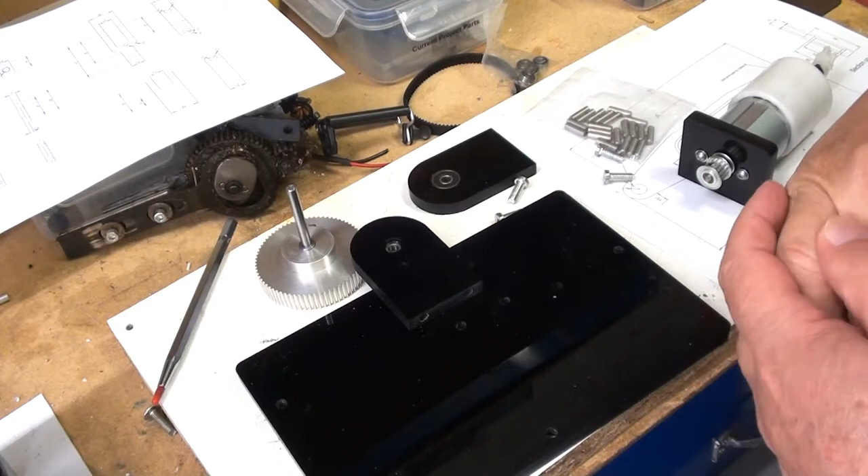Anyway, I'll take you over to the workshop bench and see what I've been up to. As you recall, this is being made from a variety of materials, a majority of which is found in my spares box or scrap bin. That is apart from the acrylic which I've used for the base, the top, and the various mountings here.

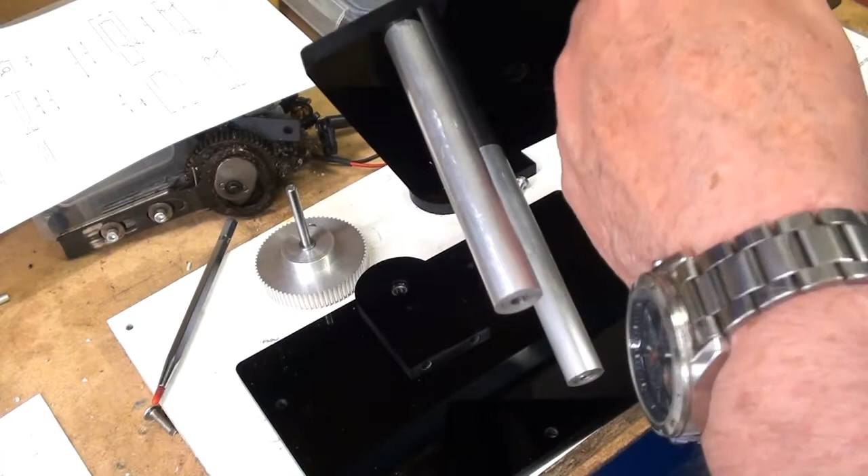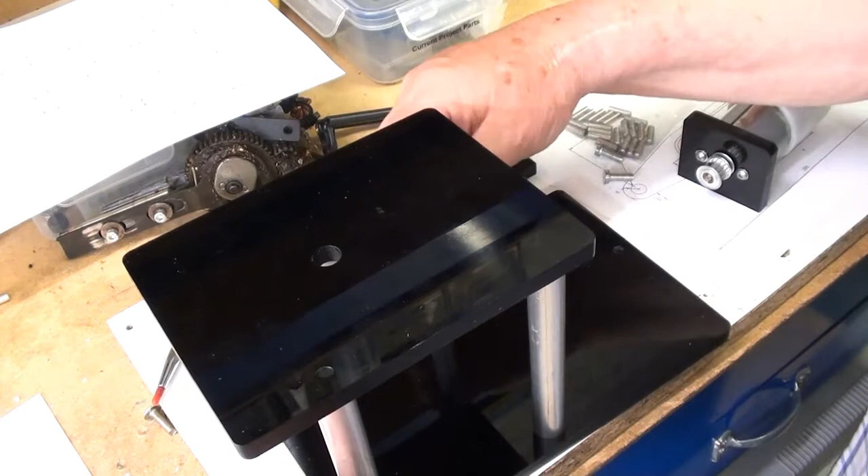I've finished the columns, not quite to the original design. What I did was I drilled and tapped both ends and then screwed some steel studding in, cut them off and faced them to a length of 8mm so that they don't come through, and that will fit like that on the base.

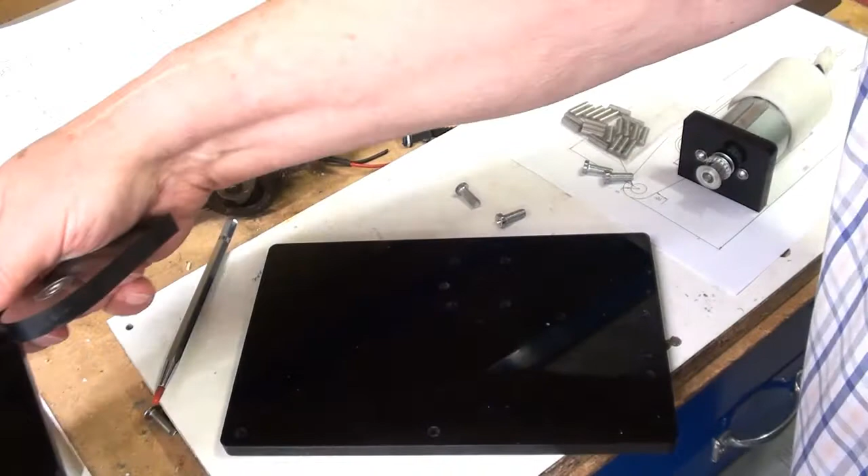The main drive pulley will fit through these mountings, pretty tight fit through the bearings, but they will go. I don't know whether you can see there. Let me move this around. Tell you what, I'll take that off, that'll be even better. So these two mountings for the spindle fit on there.

Naturally the spindle will fit through the bearings. The motor just clears with this cover on.

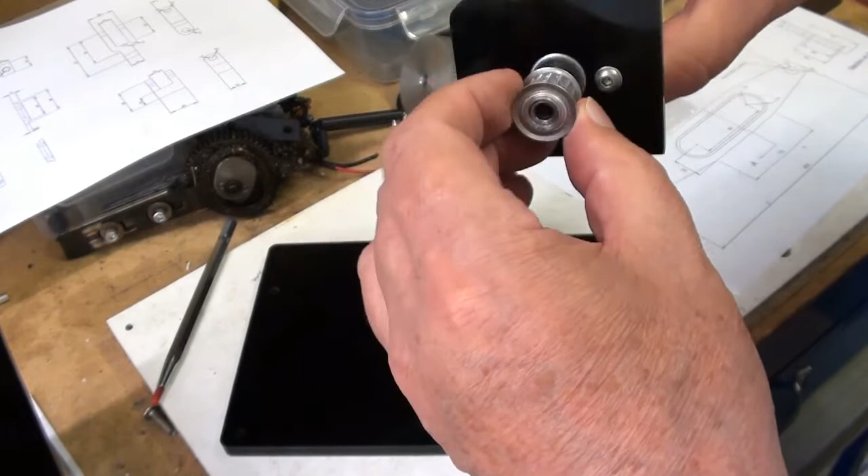Again, the small pulley was out of the spares box. I had to turn off the bush on the end, only to find out that the central hole was too big for the motor spindle, so that had to be bored out and sleeved, and a tiny little grub screw goes in there to provide the drive. That fits in those two holes there, and hopefully the pulley will line up. Obviously there's a bit of forwardy backwardy motion for lining up.

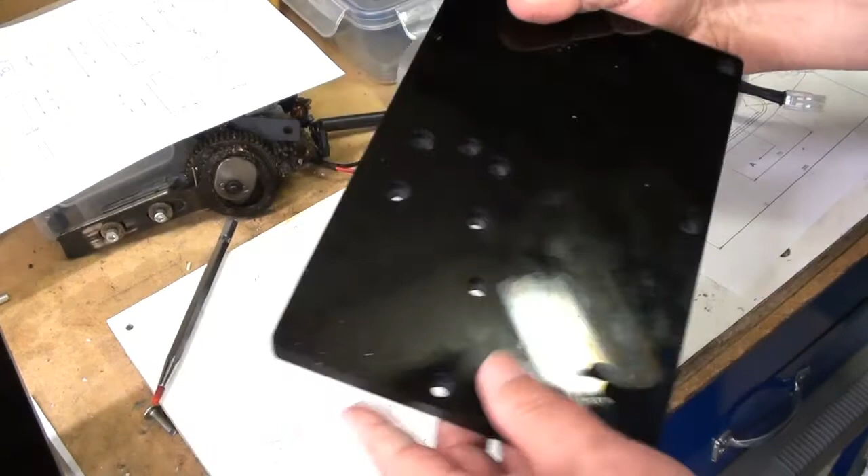And let's see, what else have I got to do? Yeah, this afternoon I'm going to just cut the metal for the ram slide, and that will fit over here. Of course this is upside down, so I can't... no, for some reason I haven't got the holes drilled for that. Right, well that's going to have to be done again.

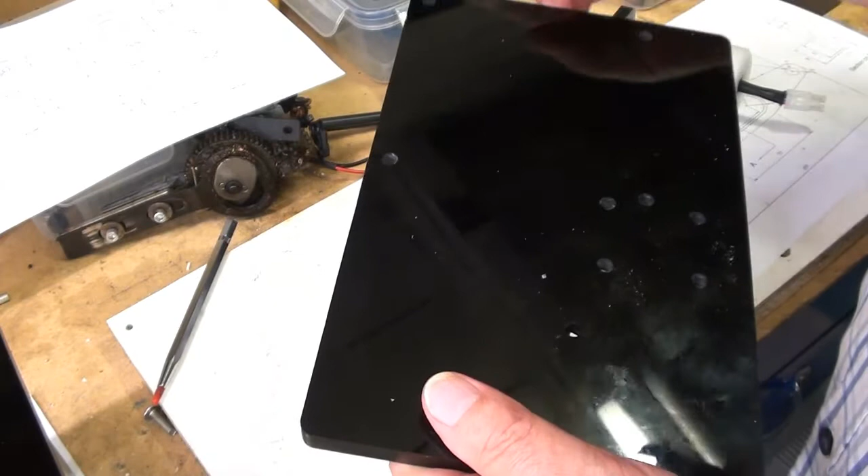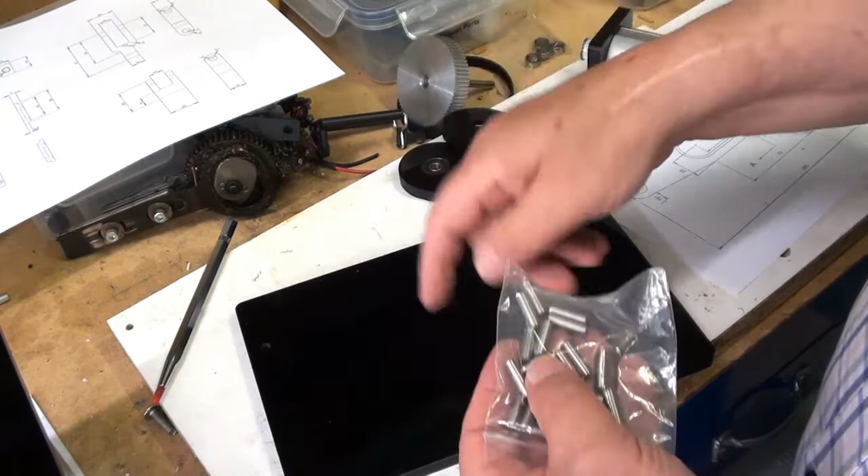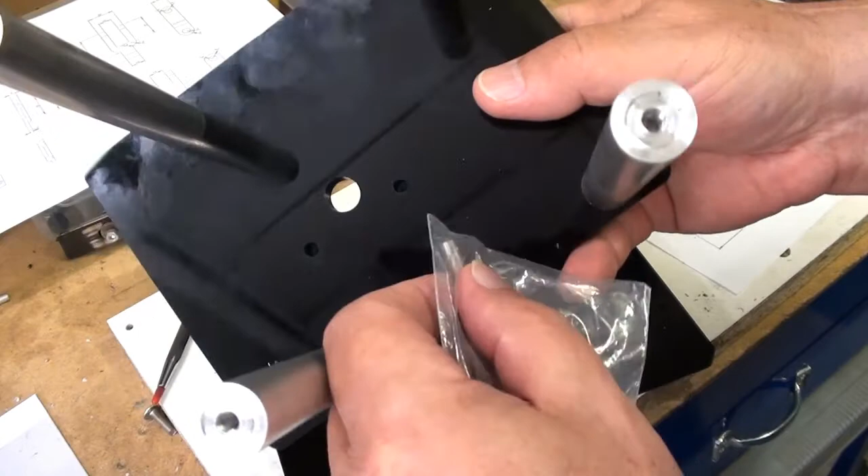I'll have to set that up in the milling machine and set an XY coordinate and drill the mounting holes for the ram slide, and that's going to go somewhere in that area. I'm going to locate that with 5mm dowel pins - no, in fact I think I'll just locate it in the top. I've got the drill holes drilled here, and whether they'll show up - there we are. I'll get the light in the right place. Those two holes, 5mm, two dowels in there to locate it at the top, and I'll drill through counterbore here to take some more screws of the modified head type that I've got here.

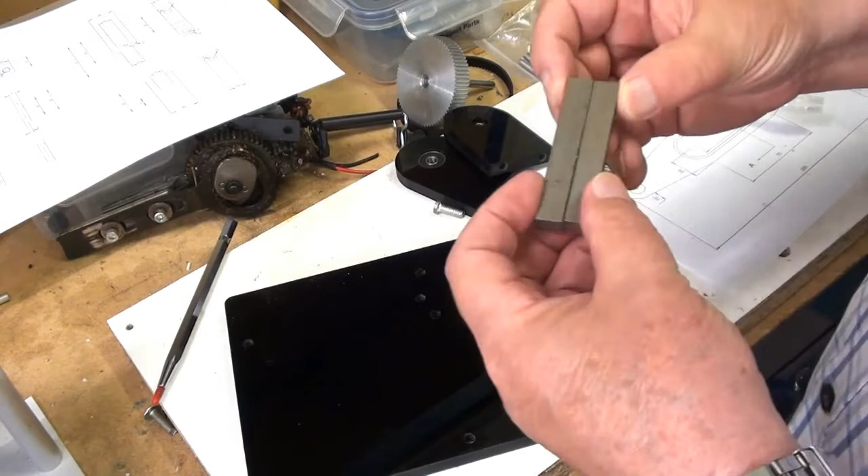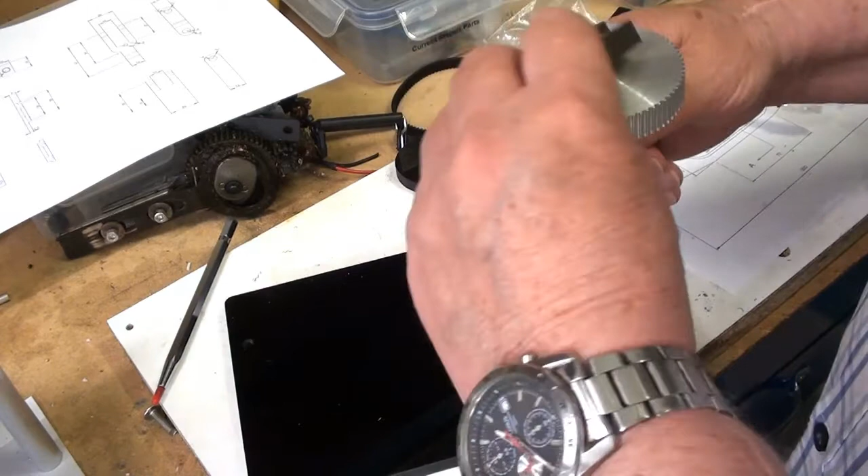So more than enough to be getting on with, but most of it's pretty regular stuff. A certain amount of metal has already been cut to size. It's got to be trimmed. I've got to take a channel out of the middle here to form the pieces that go on the wheel here. They're a bit on the long side, again they've got to be trimmed down and mounted. That will take the sort of more or less a T-bar in there, the sliding T-bar that will go in the ram arm, and yeah, I'll get on with that, and I'll bring you back when all the boring bits of metal turnery have been taken place.

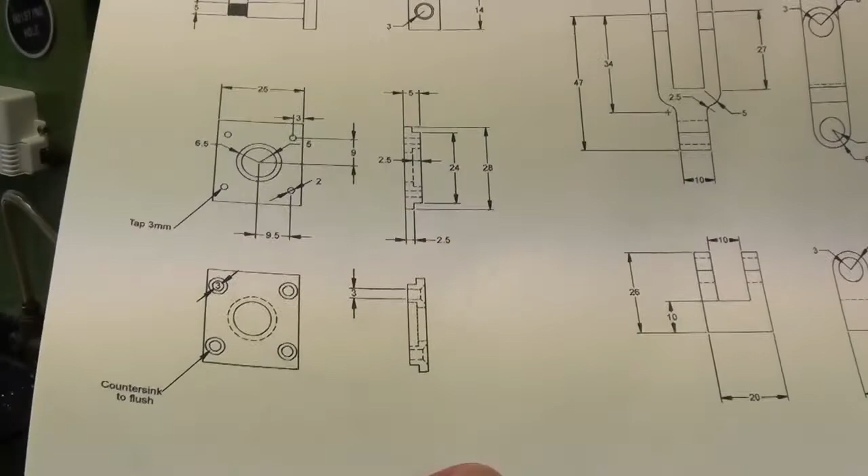Right, well, to be honest, I've been in a bit of a quandary about what to film for this part.

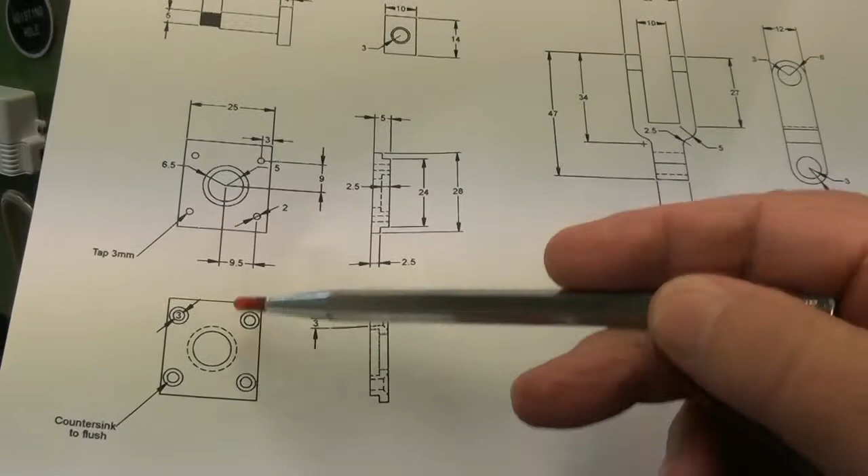Most of it is pretty boring, repetitive stuff. So what I've done, what I'm about to continue with, is the two brass bearing carriers which slide along the ram activating arm.

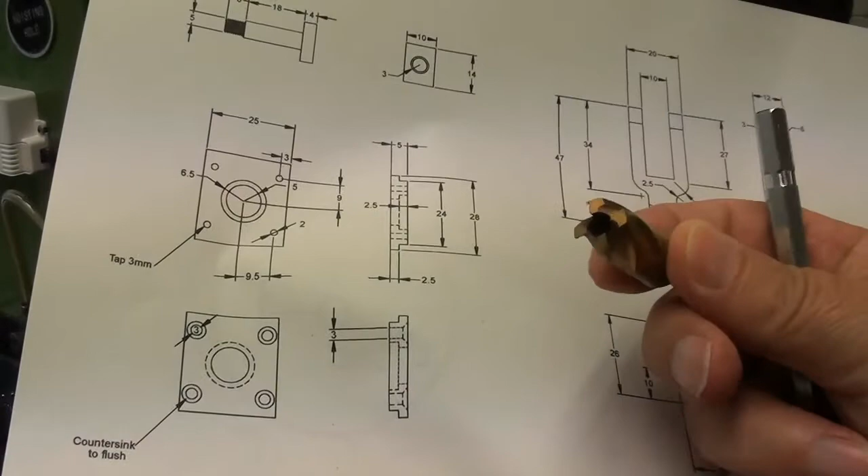I've already drilled out the centre, and I made a recess halfway through, 2.5mm for the ball bearing, using a 1/2 inch cutter. Then I use the boring head just to take a smidge out, to take it out to the 13mm

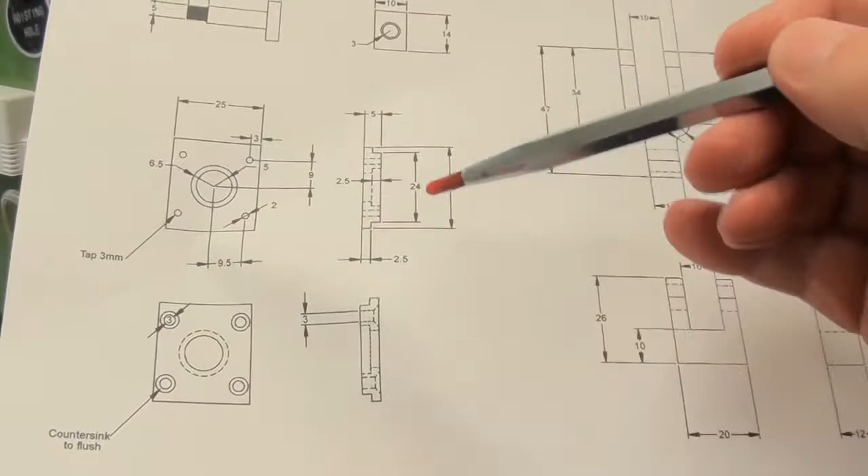recess for half the bearing. These two then clamp together, and I've now got them in the mill with a bolt through the centre. The bearing is in there, and that acts as a register for the two halves. I'll bring you in a bit closer so you can see, can't do it without too much wibbly wobbly. There we are.

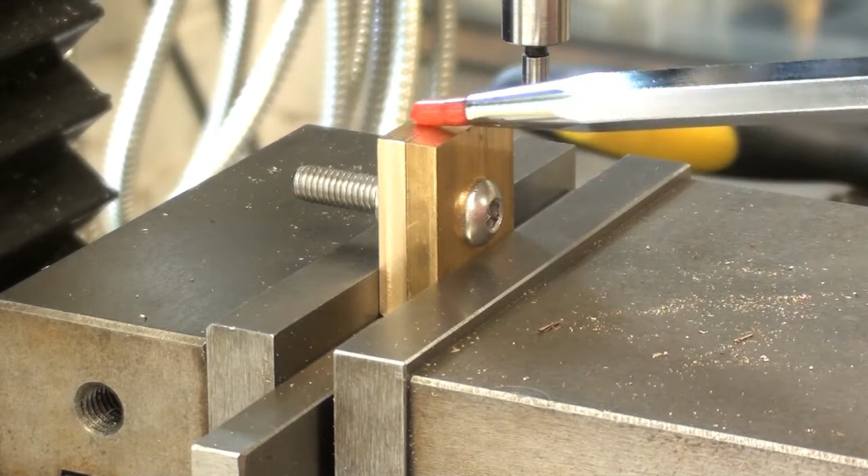Yeah, the two halves are bolted together with a 6mm bolt through the bearing, which is sandwiched between these two. I'm just about to take the

readings on the DRO so that I can centre up. I'm going to use a 4mm end mill to put a recess in the centre, and then I'll go either side by half mm to take it out to 5mm, flip it around and do the same on the opposite side.

After that, I'll be drilling the 4 holes here, which will be used to screw the two halves together. One side will be tapped, the other side will be a clearance hole for 3mm countersunk screws, and also countersunk, of course.

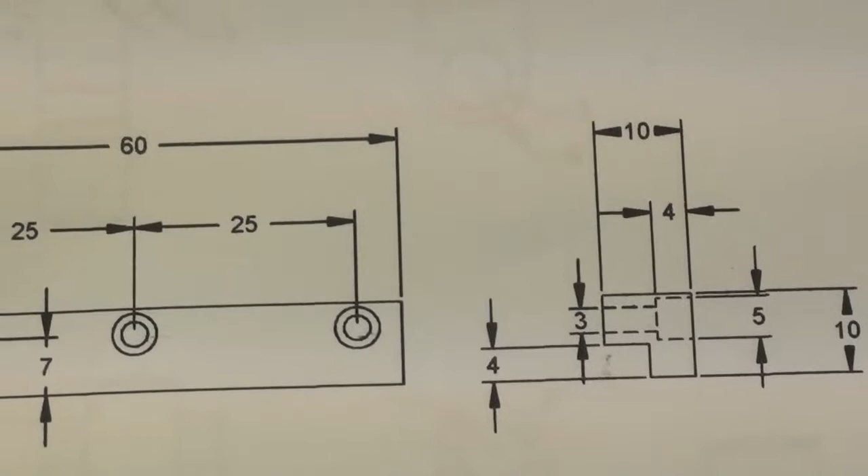And while I was getting prepared to do those, I've also done the two pieces of - where are we? There we go. Come out on the zoom, and then we might be able to see more what I'm talking about. This is in effect the bull wheel, and these two clamps fit on it.

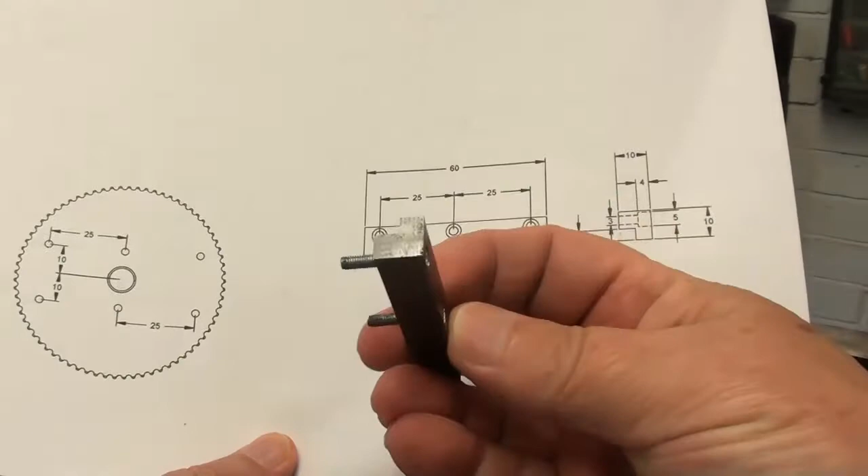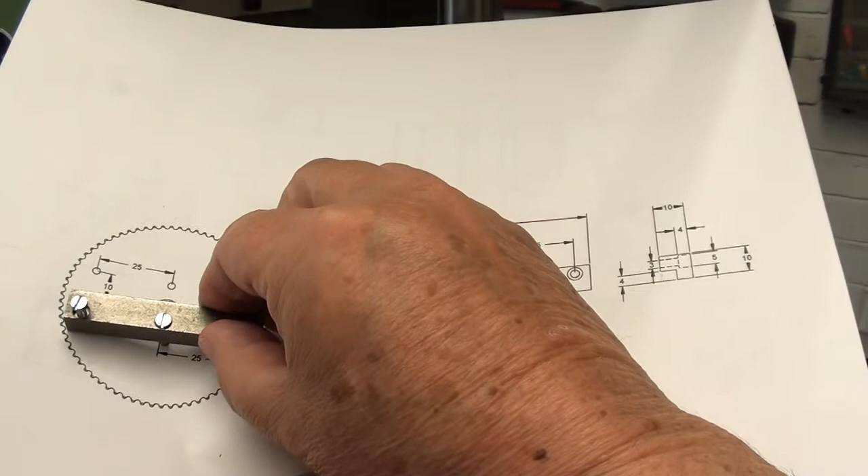I can pick one up without dropping the screws out of it. And these are - well, there goes one screw. These are L section, milled from square, obviously. Well, not obviously, but they are milled from square, and they fit on the bull wheel like that to form a channel into which the sliding bolt sits, so that you can alter the stroke.

They've been done. I've recessed the bolts, and I had to turn the heads down on these screws just fractionally. I'll put a couple of stills up to show how I held those in the lathe using a fixture which I'd used previously on another job.

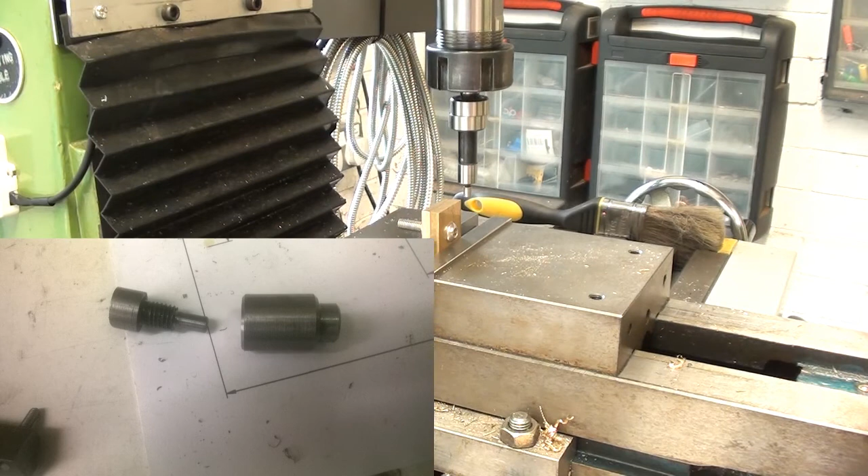Right, so I'll get on with doing this further milling. I'll take a little bit of footage of it, but you don't want to see me chuntering up and down with a mill, gouging great lumps of brass out. I'll bring you back in a minute when there's something interesting going on.

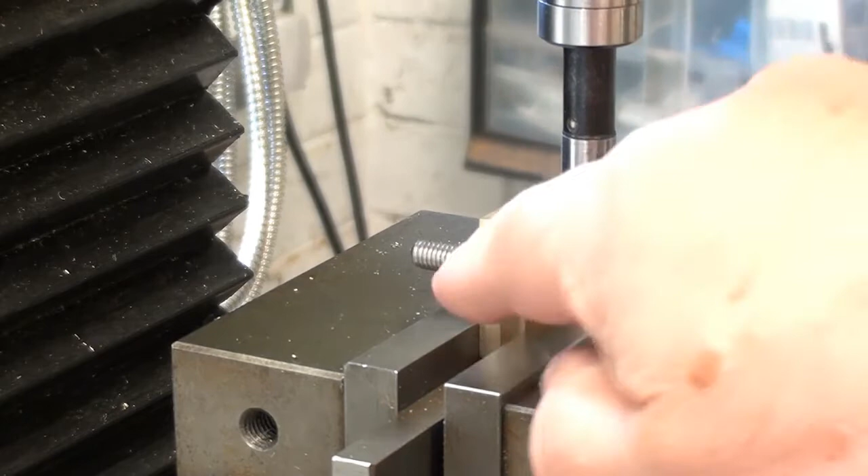Well, I thought I'd try a little experiment. I've got my telephone set up to look at the DRO, and I'm going to use the edge finder to get to the centre of this section of brass. So let's wind up the mill.

And there we go, winding in the Y until the edge finder kicks off. Now I'm getting close, and there she goes. Set the Y to 0, wind it back out, come back in just to double check. Yes, it does - 5 microns, I'm not going to quibble about that.

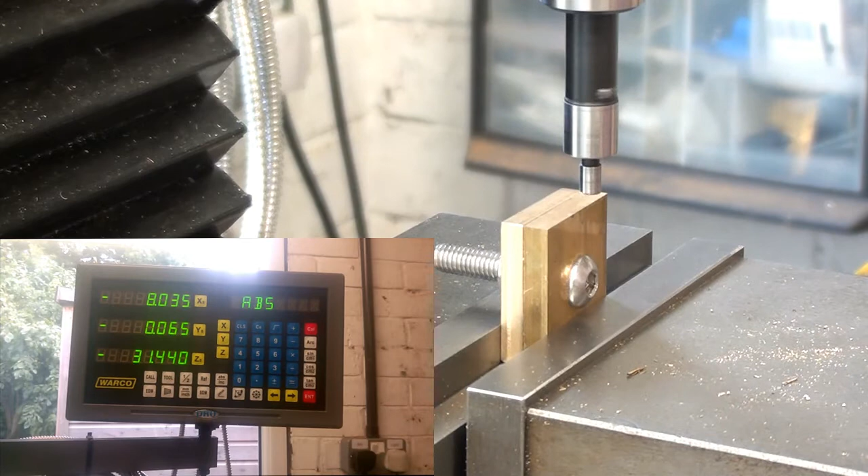Wind it over to the other side and down. You've all seen this done dozens of times, I'm sure. Wind it back in. These two pieces of brass are 5mm each, and the spigot on the end of the edge finder is 4mm, so we should be something of the order of 14mm on the y-axis as we come in, counting down 14.1.

Getting close, getting even closer, and kicking off. They're obviously not quite 5mm wide. So there we are, that's - I'll take it out and back in again just to double check. 13.65 I think it was, wasn't it?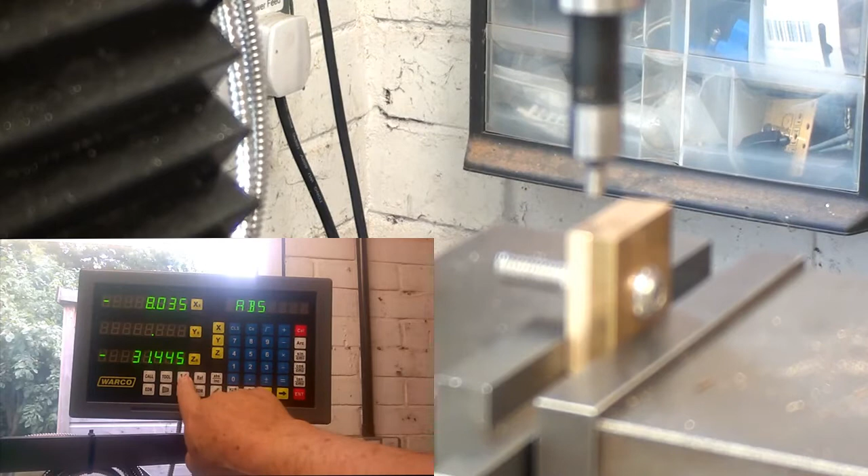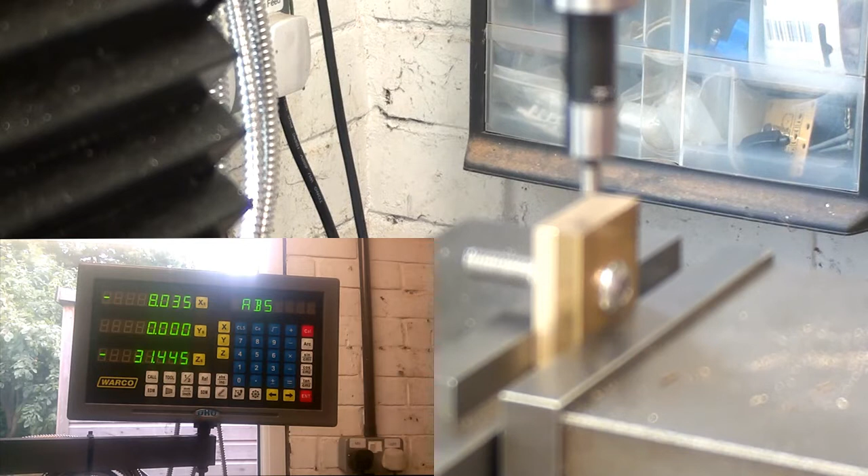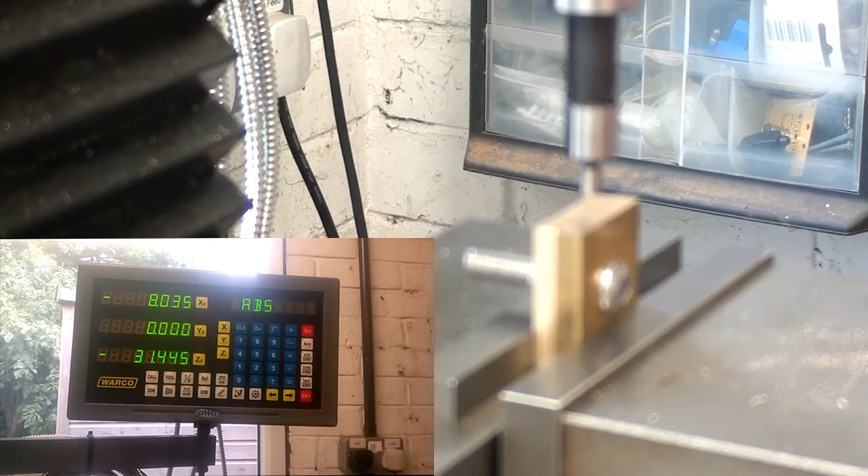I need 4 hands and 3 eyes. There we go, that'll do. Now we'll select Y and the half - is now the centre of the spindle, aligned with the midpoint of these two pieces of brass.

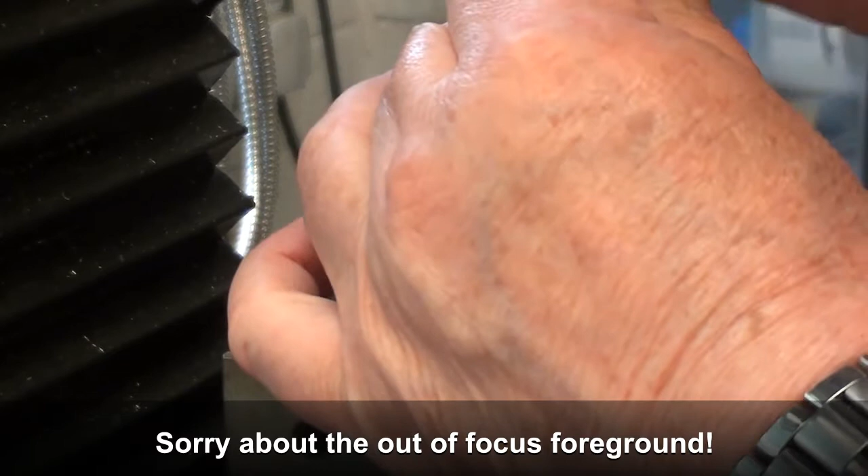Well, I hope you found that as thrilling as I did, and I'll whack a 4mm end mill up the spout and get cracking.

Okay, well, I did go away and I did fiddle around, and to be perfectly honest with you, I don't know what went wrong, but I think I've now retrieved the situation and we're back on track. Let's get that out of the way and see what we've ended up with.

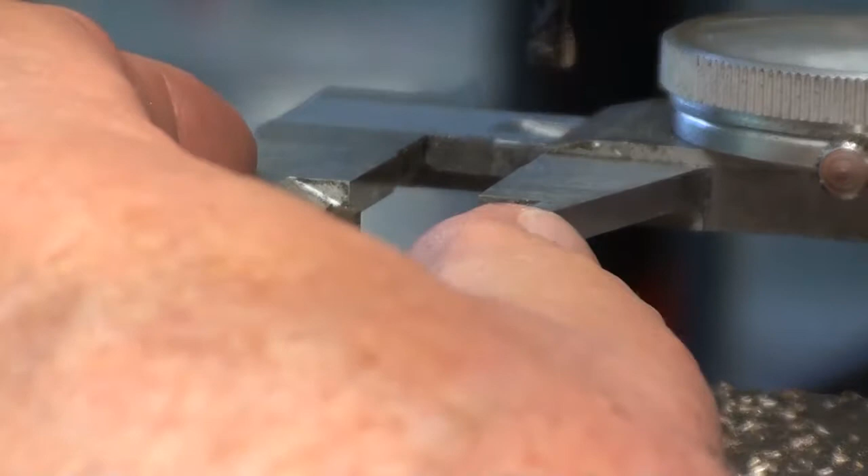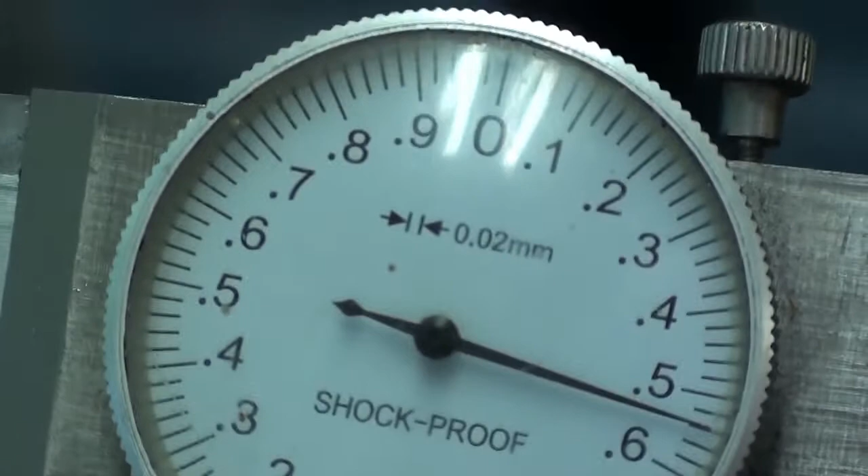This side is - where are we? Can't get it in focus. Just a tad over 2.5.

And that one is, I've got it on zoom, that's why I can't get it in there. And that is 2.5, so there's a little bit of wriggle room in there, but not much.

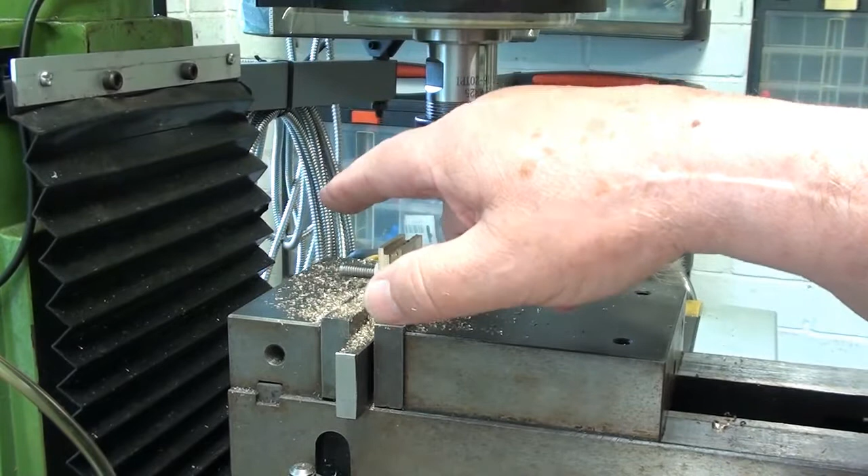I found out what was happening was the cutter wasn't cutting right down to the bottom of the groove, so it was coming down and then sort of moving out, as it were, giving a false reading. But I think I'm back to square one now.

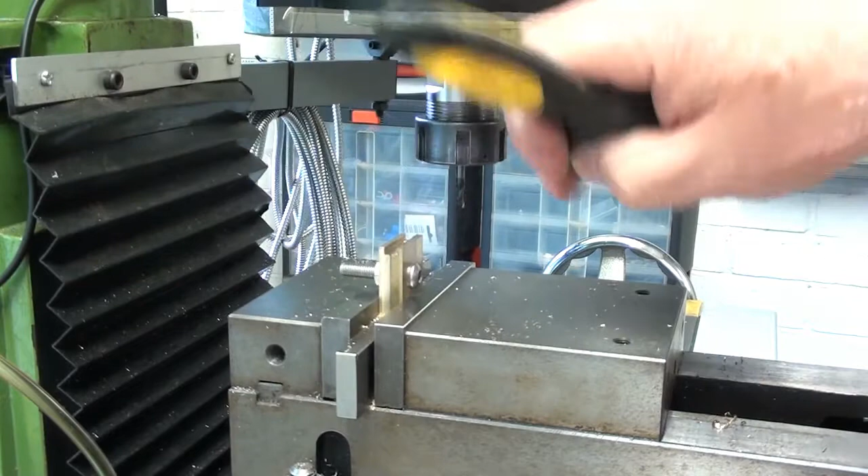So that's that one done. I'll just deburr it, take it out, deburr it, flip it over, and re-zero it. What I think I'll probably do is, rather than find the centre on the workpiece, go between the two jaws here and do it there.

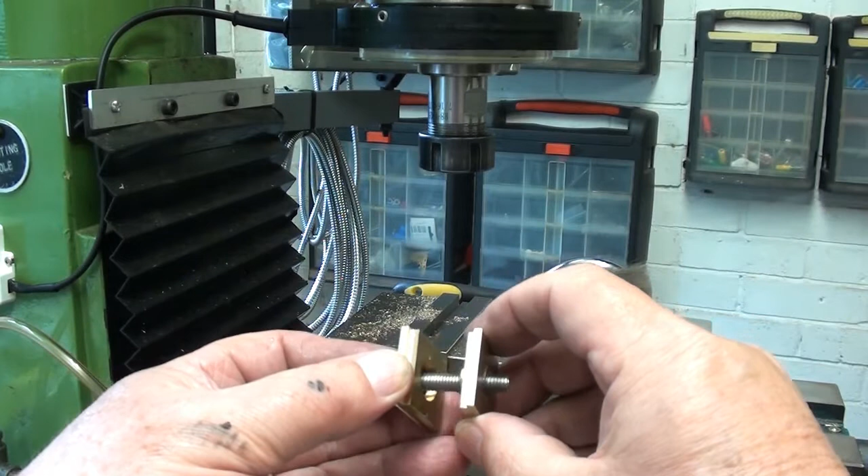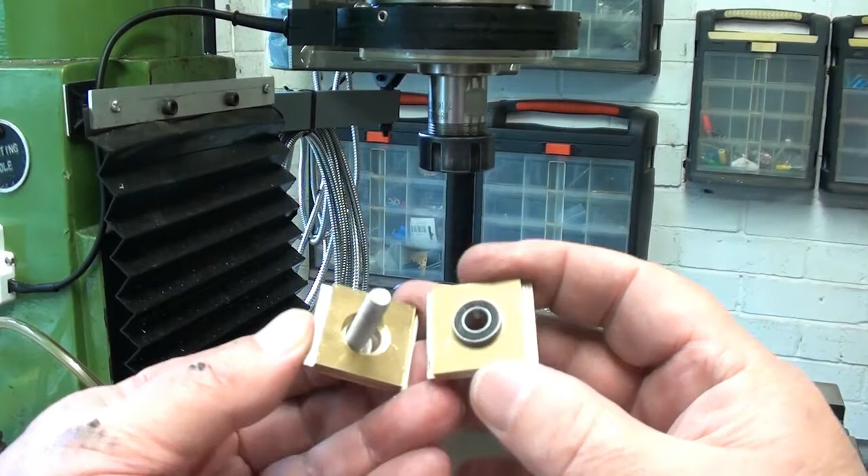Just to draw this to a conclusion, it turns out that these pieces of 5mm brass aren't in fact 5mm. Now, I don't want to take it all apart because I haven't marked the orientation, but you can see, well, I'll take that out there. That's how the two halves are registered together. Let's put that back before I lose the registration. There we go. I'll just pop a centre mark on these two faces here so that I know which way they are aligned.

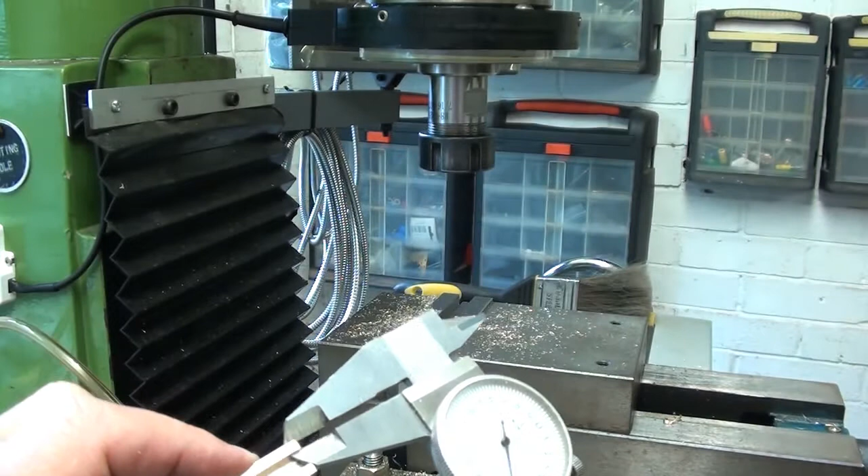These are now .5 wide. There's a burr on that one. 2.5. And unfortunately the bit in the middle is 5mm. Blow me down. I don't know how that's worked out. Oh dear. 5mm.

I did notice when I was milling that there was a certain amount of deflection on the 4mm cutter, which would account for the little bit at the bottom of the cut. But there we go. Mystery solved.

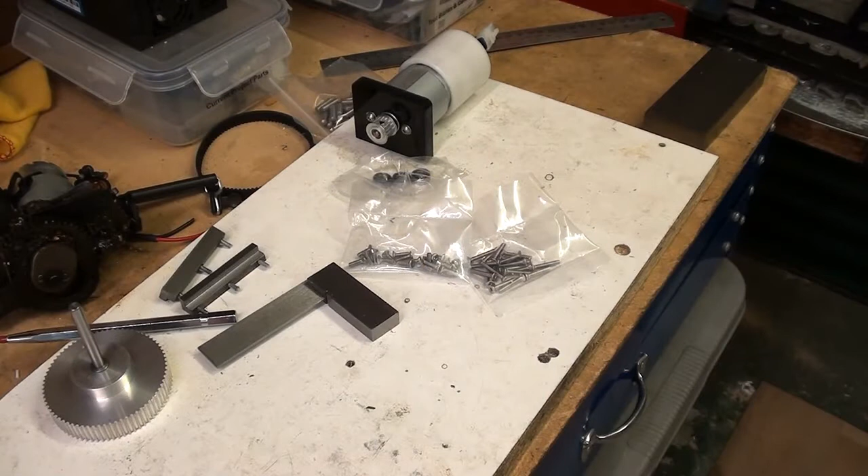Well, as you can see, we're back on the bench, and this is turning into a decidedly bitzer project. Bits of this, bits of that, and mixed materials. So I've decided to cut this video, not short because it's been dragging on a bit, but I'm going to stop here. I've been delayed by my wife's unfortunate accident and having to nursemaid, but also deliveries of things like these tiny wee countersunk screws for the various bits and bobs. And well, last week of course I had to wait for a delivery of metal, and the design is evolving.

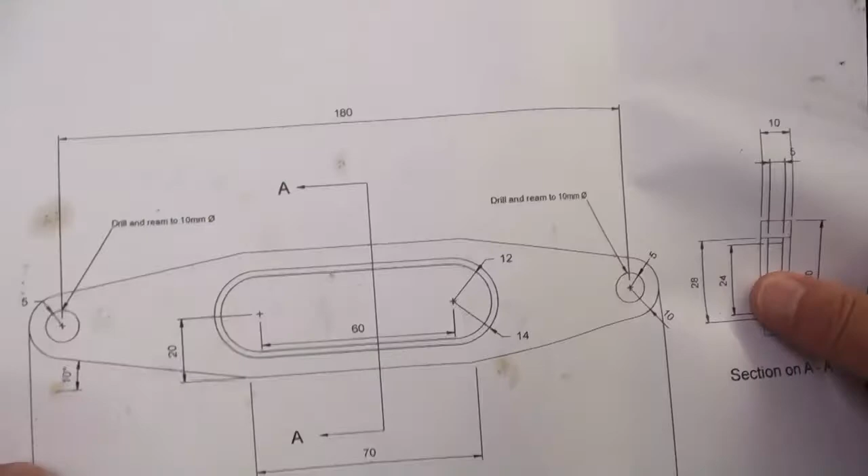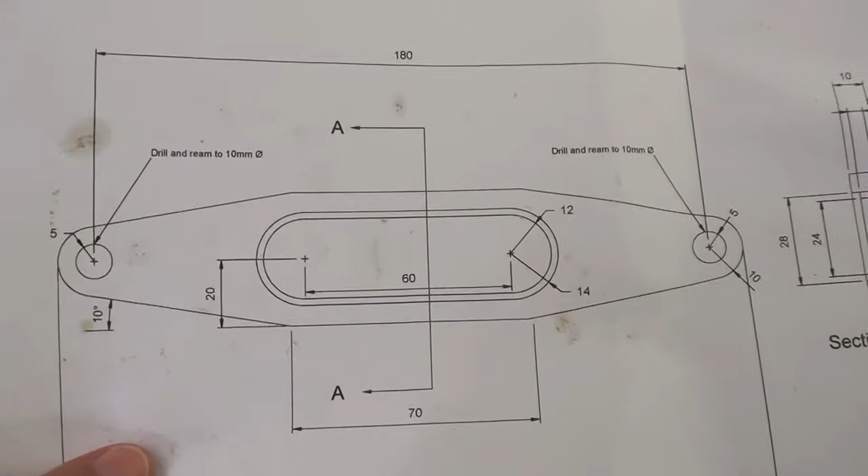Originally, if you recall, this was the design of the RAM link, and I decided to change the cutout in the middle where the slider that we've been machining fits, to make it easier to machine. I was trying to work out how I was going to cut these rebates on the end here, and I thought, well, boring head's the obvious way to go. But that was going to be tricky, so I redrew the RAM.

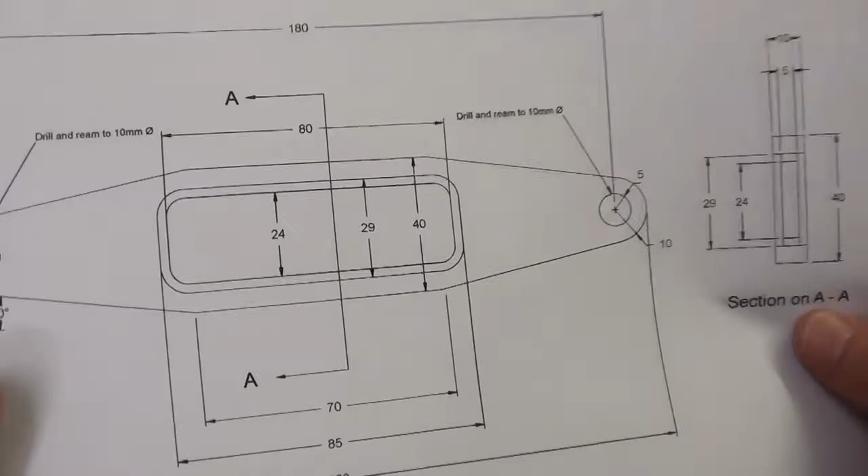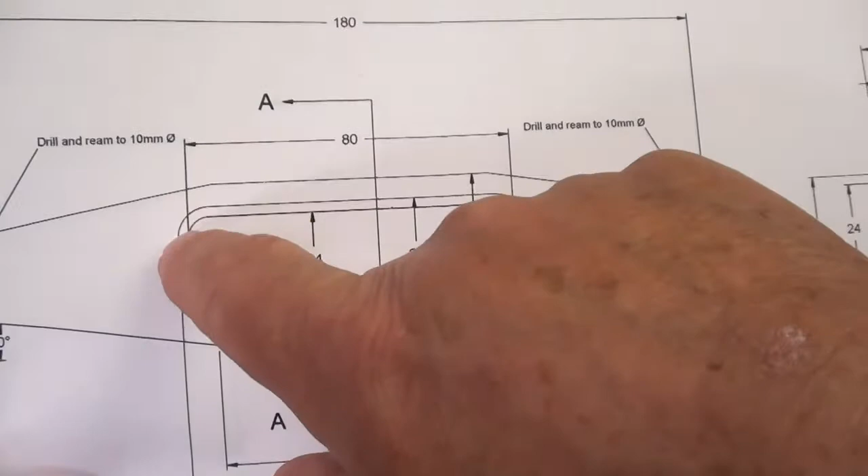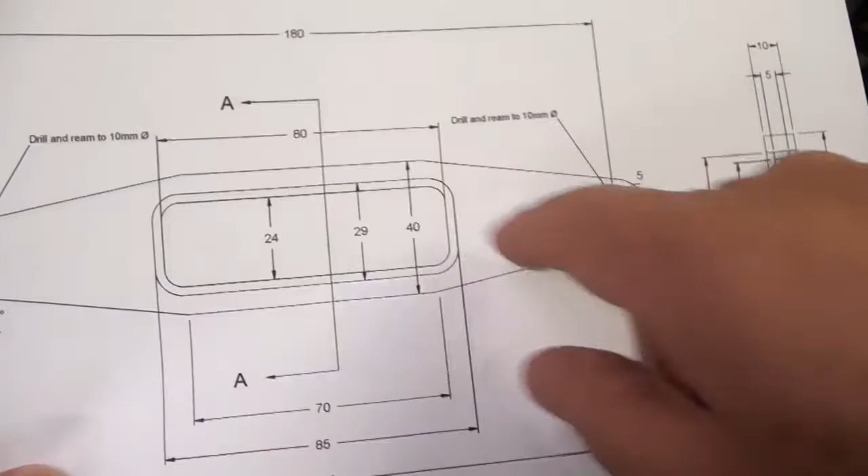I changed the dimensions very slightly so that I can now mill it out with end mills, this inner one being a 5 mil radius and the outer one an 8 mil radius corner, simply because I've got 10 mil and 16 mil end mills, and it's just a matter of drilling out the centres and then joining up the dots. When it's finished, flipping it over and doing the same thing again. So that's what I'm going to be doing next, I think, once I've tidied up one or two loose ends.

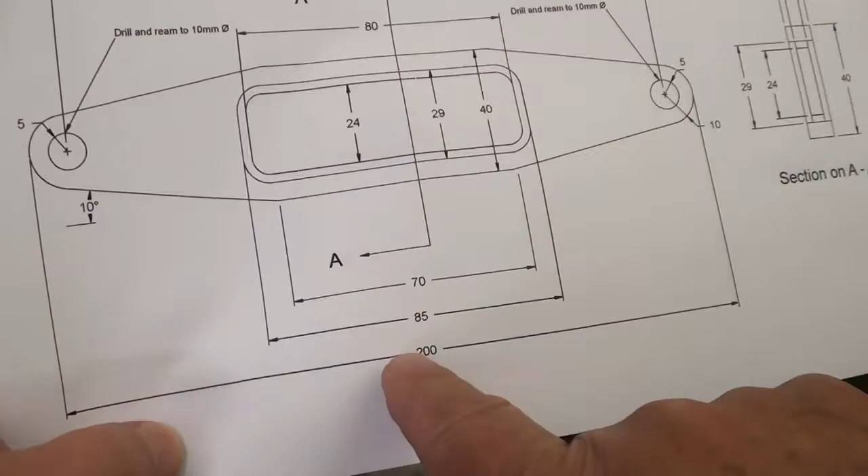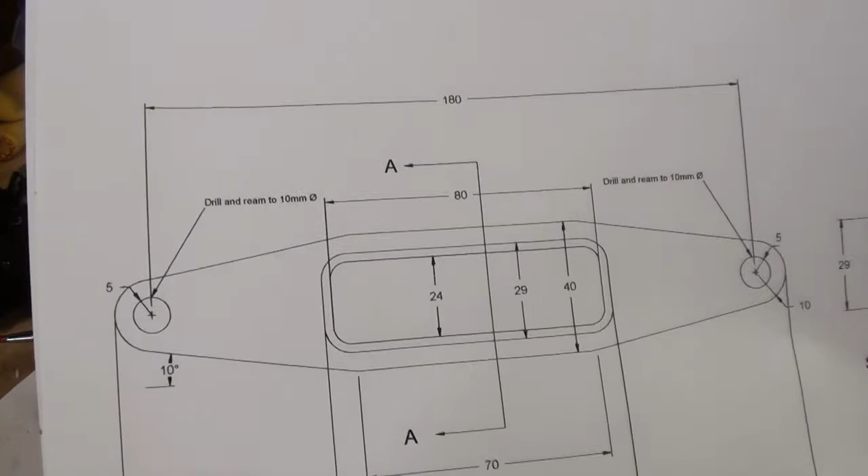And to that end I've cut the piece of material. Unfortunately I cut it to this length and not that length. So yesterday I reordered the metal, and that was Friday. Not going to be posted off till Monday. It's coming Royal Mail, so probably Wednesday at the earliest next week, so that's going to delay me by almost a week, but it will give me a chance to get on and finish all the other little incidental bits and bobs, like drilling the mounting holes for the slider retaining brackets.

And I may even make a start on the ram slide and the ram itself, for which I have the material and I haven't cut it too short.